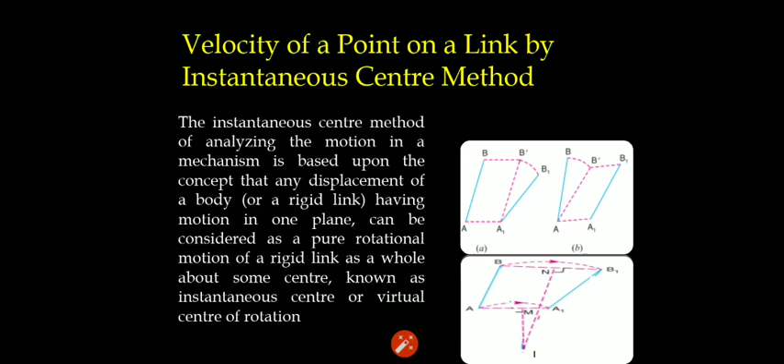If you observe this diagram, you can consider AB as one of the links which has moved from its position, that is end A has moved to A1 and B has moved to B1. During this motion, the motion consists of a pure translatory motion, that is from A1 and B dash.

After that there is a rotational motion about center A1, that is point B dash has moved to B1. So it is a combination of two motions: one is translatory motion and the other is rotational motion.

If I consider only rotational motion from B dash to B1, the center of rotation is A1. But if I consider the combined motion of point B from B to B1, then what will be its center of rotation?

That center of rotation will change time to time. That's why it is called the instantaneous center of rotation. It will be particular for any position of the link in the mechanism.

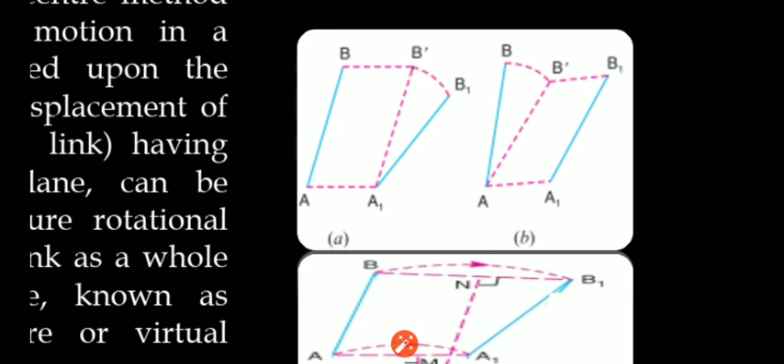In this case, the instantaneous center of rotation can be found as shown in the figure below. If I connect point A to A1 and B to B1, and draw a bisector from line A to A1 and B to B1, their intersection will be, say, at point I. Then I is nothing but the instantaneous center of rotation for that particular link.

So here the motion consists of translatory as well as rotational motion, and we are assuming that it is a pure rotational motion about a center, that is I, which is called the instantaneous center of rotation.

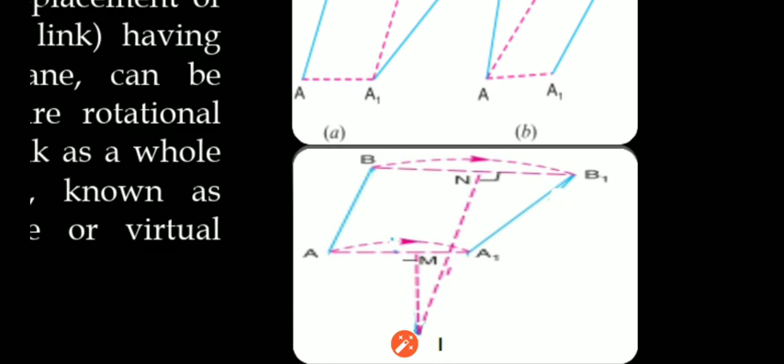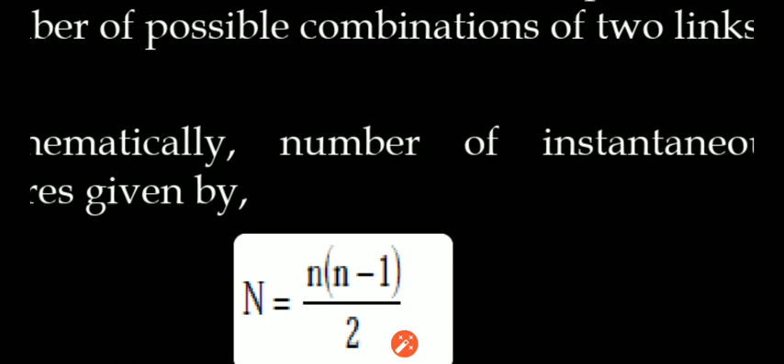Now, how to find out the number of instantaneous centers in the mechanism? The number of centers in the mechanism is nothing but the number of possible combinations of two links. Mathematically we can write it as N equals small n into n minus 1 divided by 2, where N in capital letters represents the number of instantaneous centers, while small n represents the number of links in the mechanism.

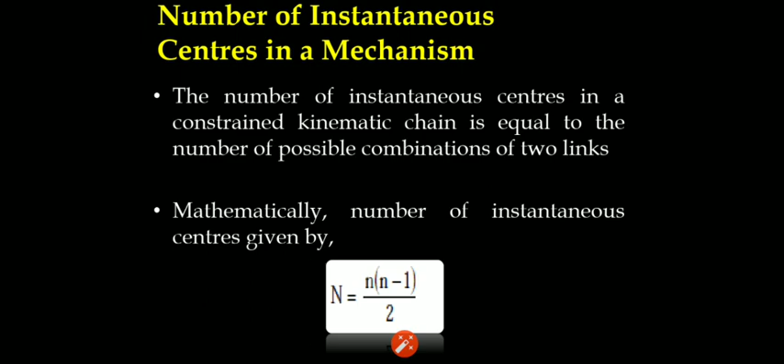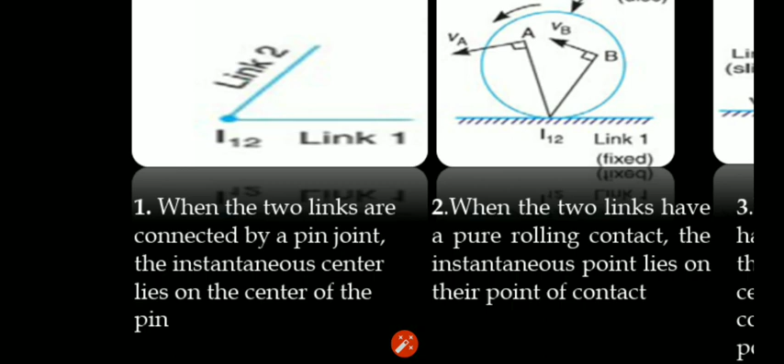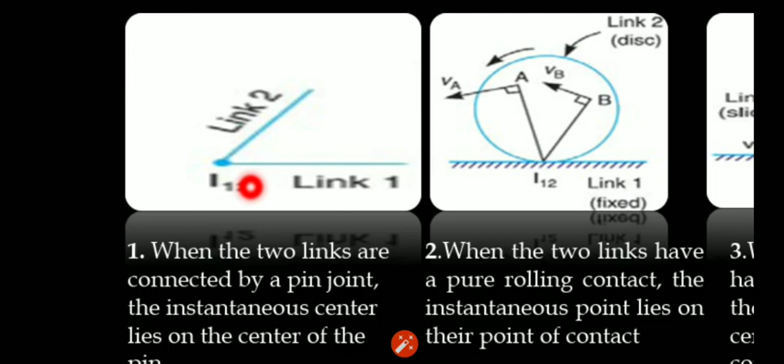Coming to the next topic, location of instantaneous centers. In the first diagram, if there are two links connected to each other by a pin joint, then the instantaneous center of rotation lies at their joint, that is I12, representing the instantaneous center of rotation for link 1 and 2.

Second example: if you take a disc as one of the links which is rolling over a surface, that is another link, its instantaneous center of rotation always lies at the point of contact between the disc and that surface, that is I12.

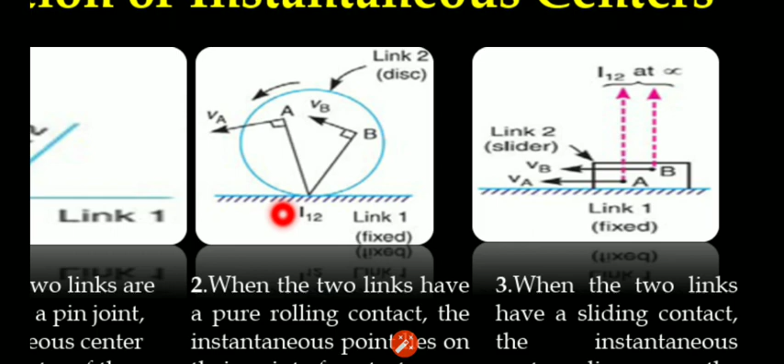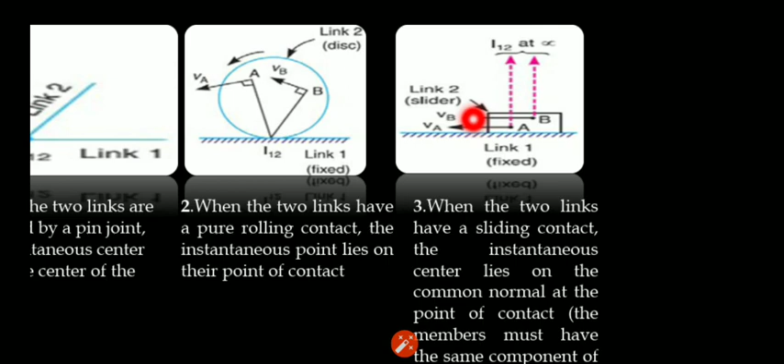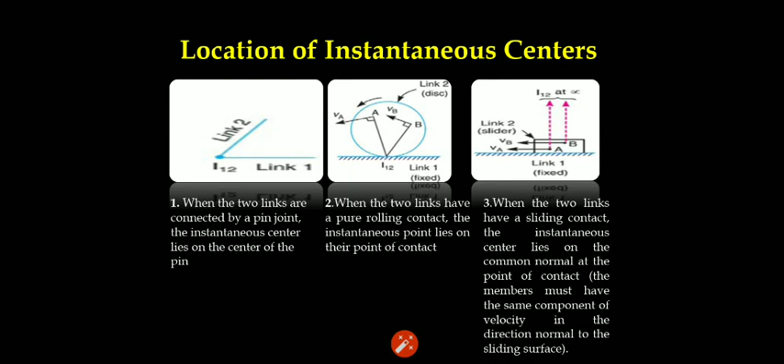If you take the third example, if there are two links having a sliding contact, then the instantaneous center of rotation always lies at infinity, which is perpendicular to the surface over which the second link is moving. So here link 1 is fixed, which I have assumed as a surface over which this second link is moving, which is having complete translational motion, then its instantaneous center always lies at infinity. So these are the various positions where the instantaneous center of rotations lies.

These are some examples. Coming to the next point, that is type of instantaneous centers. There are three types of instantaneous centers. One is fixed instantaneous center, second is permanent instantaneous center, and third one is neither fixed nor permanent instantaneous center. So we'll see one by one.

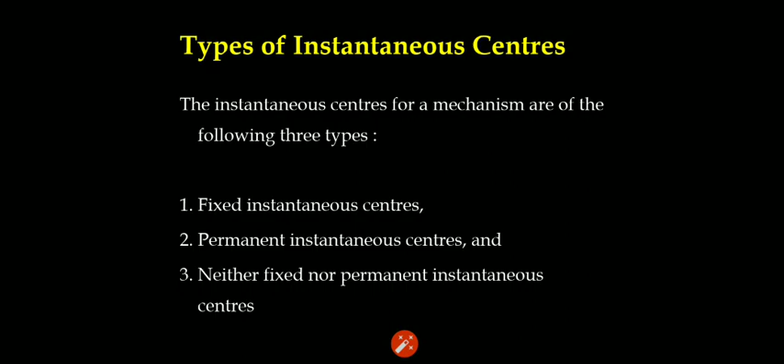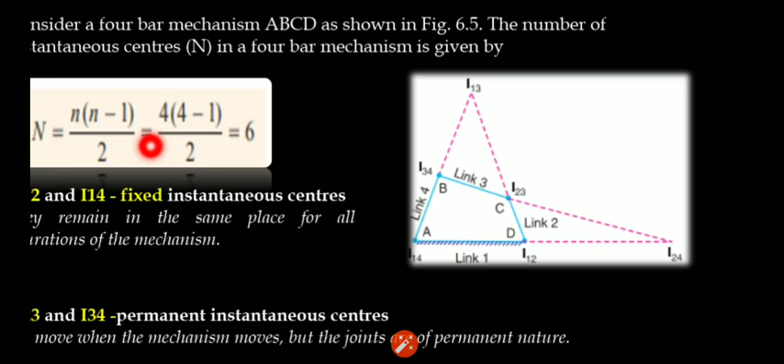Now if I consider a 4-bar mechanism which is shown in this diagram, there are 4 links. Link number 1 is fixed here. This is your second link, third and fourth link. So if I want to calculate number of instantaneous centers, I can use the formula, that is n equal to n into n minus 1 divided by 2, which we have discussed earlier. So by this we'll get number of instantaneous centers equal to 6.

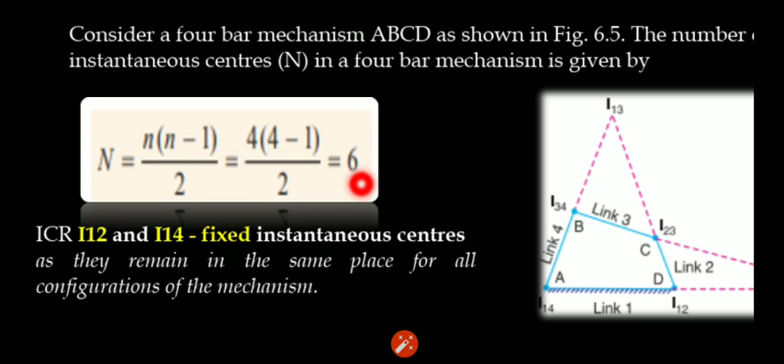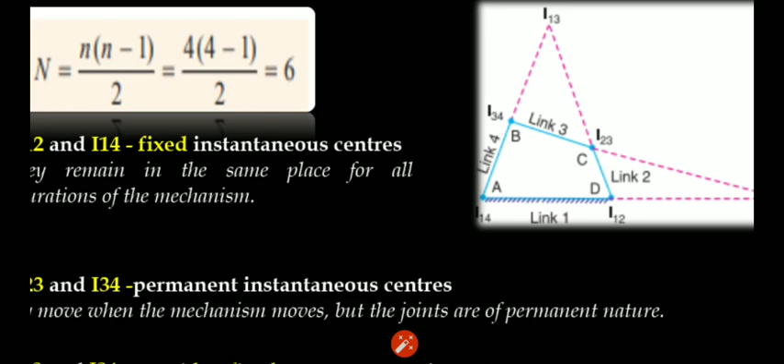Out of these 6 instantaneous centers, some of the instantaneous centers will be marked by observation and remaining can be marked using Kennedy's theorem. So what are the different instantaneous centers that can be marked by observation?

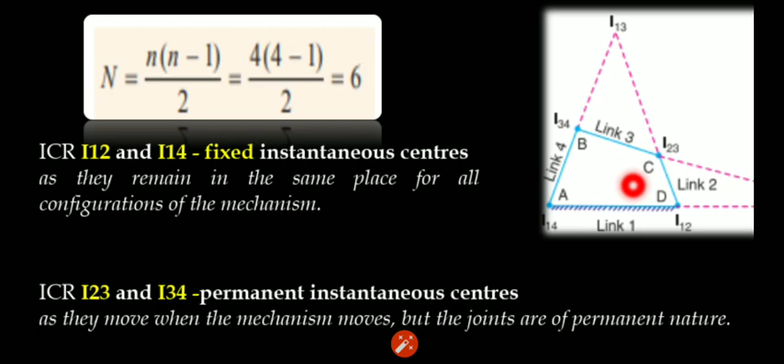The first one, that is I12 and I14. These are at pin joint. So link number 1 and 2 here is connected at point D. So this I12 is a fixed instantaneous center. Similarly, link number 1 and 4 is having a pin joint at I14. So it is also a fixed instantaneous center.

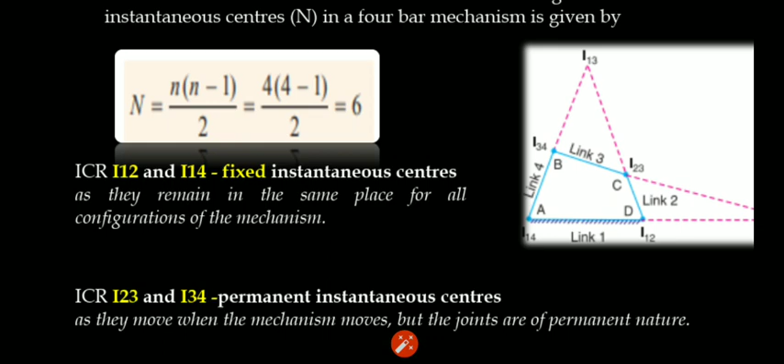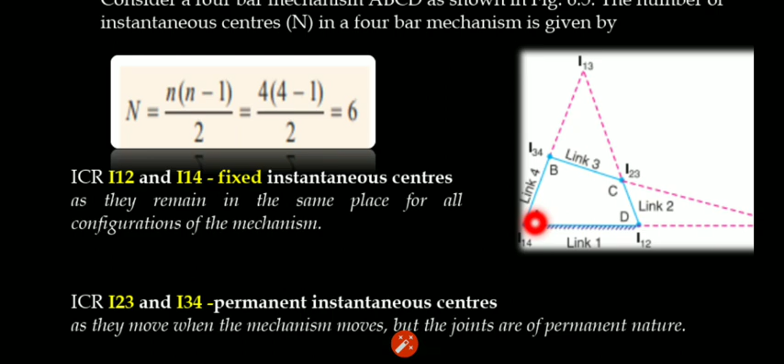So what is fixed instantaneous center? It is an instantaneous center which remains in the same place for all configurations of the mechanism. So even if there is a change in configuration in the mechanism, the instantaneous center which remains at its position, that is called fixed instantaneous center. So generally it is always located on the fixed link. Link number 1 is fixed. That's why the ICRs which are related to link number 1 are fixed ICRs.

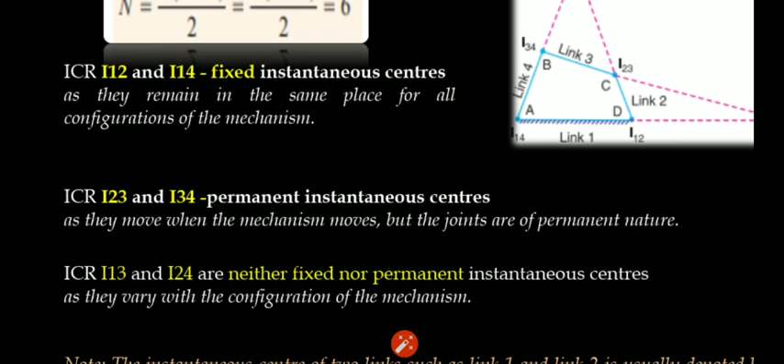Coming to the next, I23 and I34. So here you can observe I23 which is between link 2 and 3, that is a pin joint, and I34 is a pin joint between link number 3 and 4. These two ICRs are called permanent instantaneous centers.

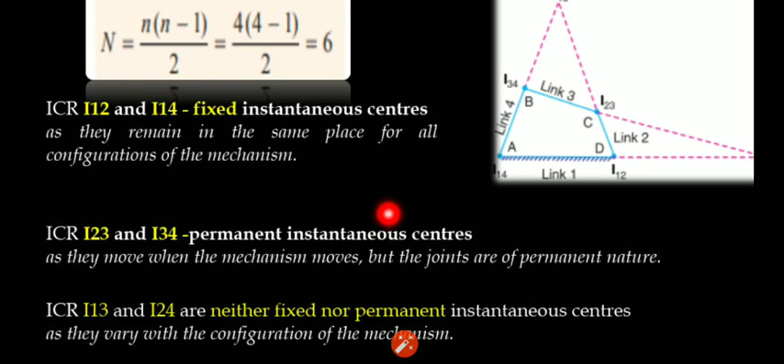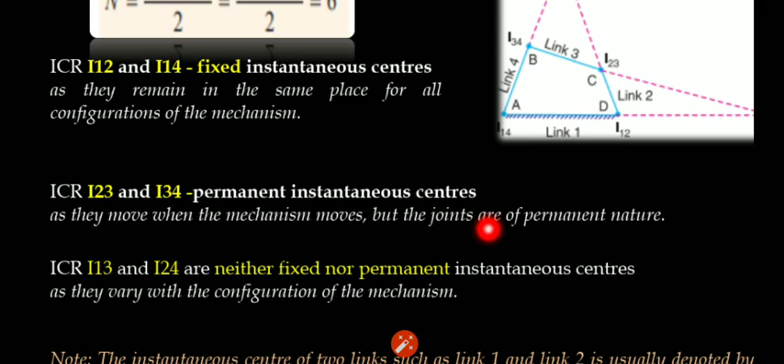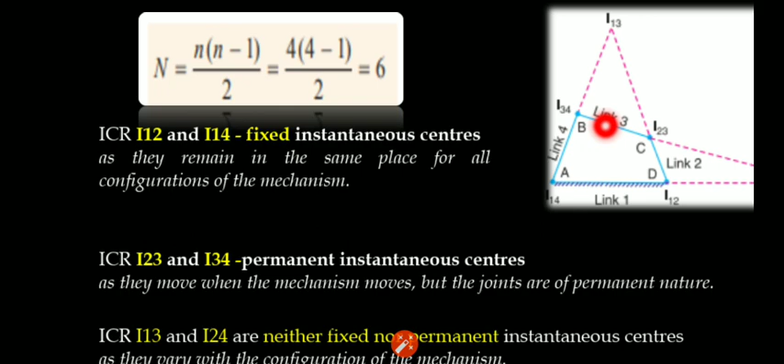So what is permanent instantaneous center? These instantaneous centers move when the mechanism moves, but the joints are permanent in nature. So when the configuration of the mechanism changes, their location is always at a pin joint, that is at the pin joint of link number 2 and 3, and link number 3 and 4. So they do not remain at a particular position always. As configuration changes, their position also changes, but it is always at a pin joint between the two links. That's why these are called permanent instantaneous centers.

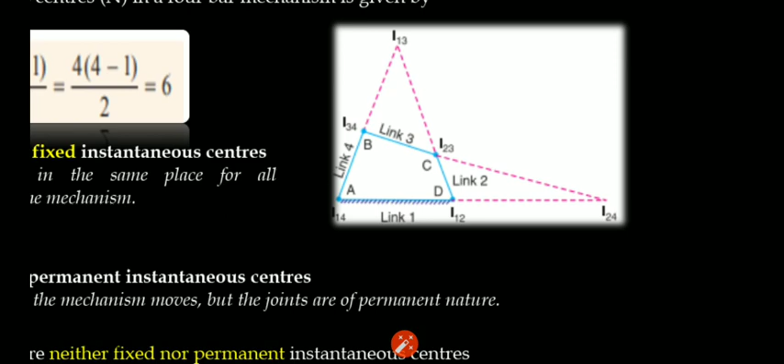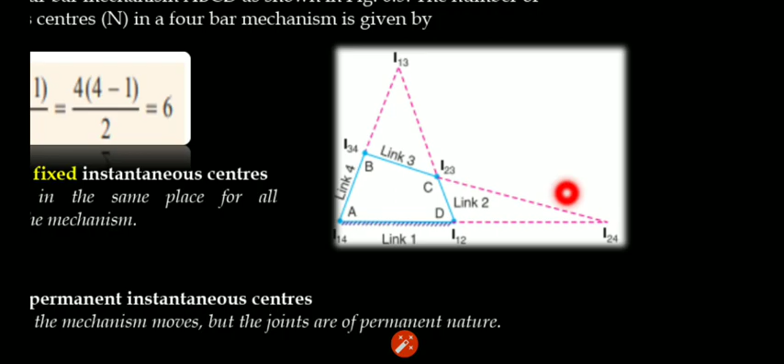The remaining two are I24 and I13. The instantaneous centers which are neither fixed nor permanent are called neither fixed nor permanent instantaneous centers. So remaining all are neither fixed nor permanent type of instantaneous centers, which can be located using Kennedy's theorem.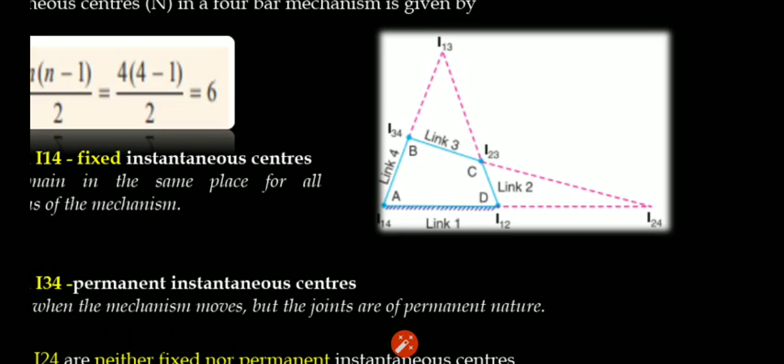These instantaneous centers vary with the configuration of the mechanism. So at every instant, or when the configuration of the mechanism changes, their position is also changing, and that is called neither fixed nor permanent instantaneous centers.